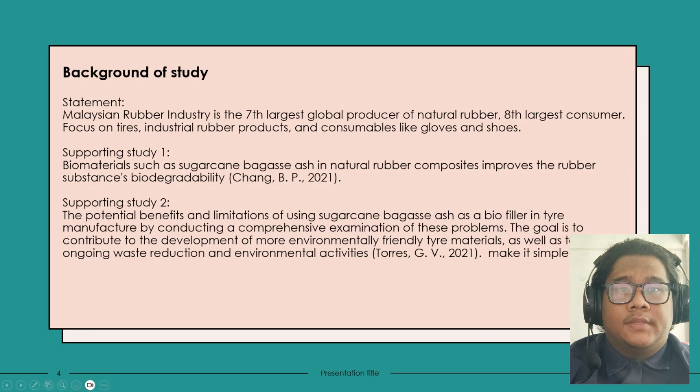Problem statement: carbon black limitation. Carbon black offers high tear strength, modulus and fatigue resistance in rubber, but experiences diminishing returns beyond a peak amount. The effect of transition to sugarcane bagasse is the second point, focusing on sugarcane fiber as a reinforcing filler for sustainable practice, and investigation into the chemical, physical and mechanical properties of sugarcane bagasse ash (SBA).

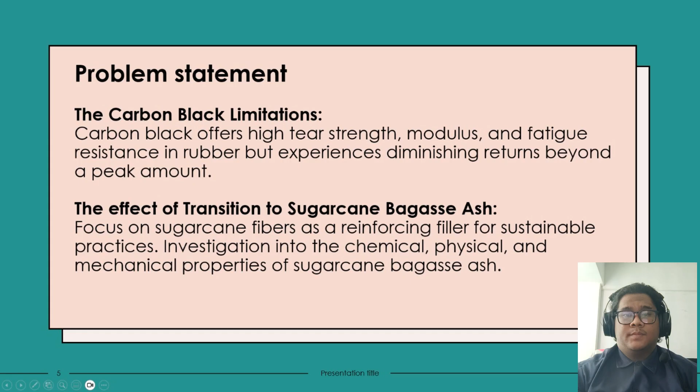Significance of study: the advantage of using bio-sourced material as a filler in the rubber industry. Objectives of study: first, the effect of replacing traditional filler material with bio-based filler on the mechanical properties of rubber compound. Second, how the incorporation of biofiller in rubber compound affects the curing characteristics and processing behavior. Last, the environmental and sustainability benefits of using biofiller in rubber compound formulation compared to conventional filler.

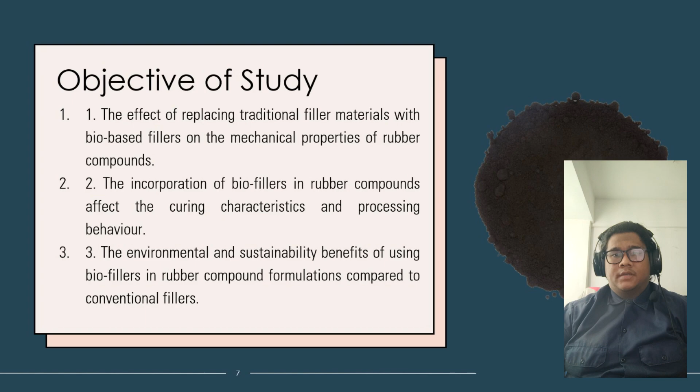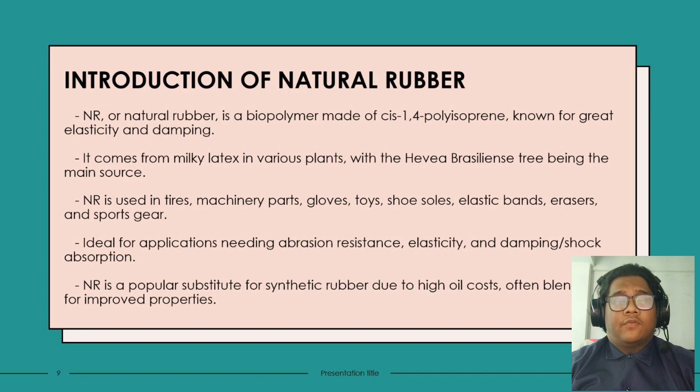Chapter 2, Literature Review. Introduction of natural rubber: natural rubber is a biopolymer made of cis-1,4 polyisoprene, known for great elasticity and damping. It comes from milky latex in various species, with the Hevea Brasiliensis tree being the main source. Natural rubber is used in tires, machinery parts, gloves, toys, shoe soles, elastic bands, erasers and sport gear. It is ideal for applications needing abrasion resistance, elasticity and damping shock absorption. Natural rubber is a popular substitute for synthetic rubber due to high oil cost, and is often blended for improved properties.

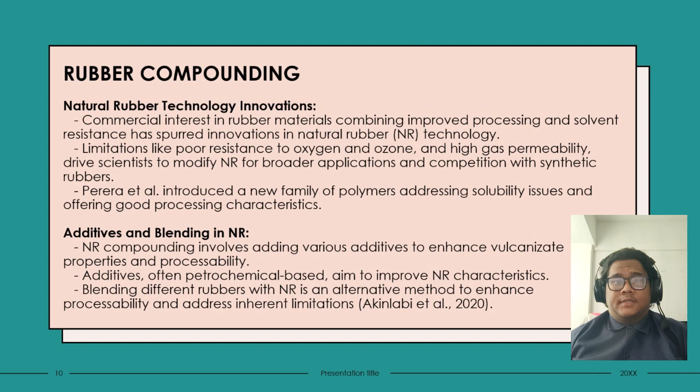For rubber compounding: there's a growing commercial interest in rubber material that offers both improved processing and solvent resistance. Natural rubber has limitations such as poor resistance to oxygen and ozone, along with high gas permeability. This challenge pushed scientists to modify natural rubber, making it more versatile and competitive with synthetic rubber. According to Perera et al., who introduced a new family of polymers to address solubility issues and provide excellent processing characteristics, this innovation brings forth material that not only overcomes solubility challenges but also offers good processing characteristics. This means natural rubber can now find application in a broader range of industries, competing more effectively with synthetic counterparts.

Moving to eco-friendly composites: natural material plays a crucial role in developing environmentally conscious products. Natural materials like sisal, hemp, jute, kenaf and others are commonly used for environmentally friendly composites. Agricultural waste and byproducts are increasingly utilized for composite development, promoting a circular economy. According to Chang, BP, waste-derived material, when processed and purified, serves as a versatile and eco-friendly filler for various polymer systems, including rubber.

Shifting our focus to biocomposites: this material offers a sustainable solution to environmental challenges and limited petroleum resources. Sisal, hemp, jute and others are popular natural fillers for environmentally friendly composites. Agricultural waste and co-products are gaining attention for biocomposite development due to their low cost, abundance and satisfactory performance.

Concluding our discussion, waste-derived bio-based filler holds significant potential for biocomposites derived from agroforestry and agricultural waste biomasses. This material, after processing and purification, can serve as a multifunctional green biofiller for different polymer systems, including rubber. In summary, the utilization of both natural and waste-derived materials paves the way for more sustainable and eco-friendly solutions in rubber compounding and biocomposites.

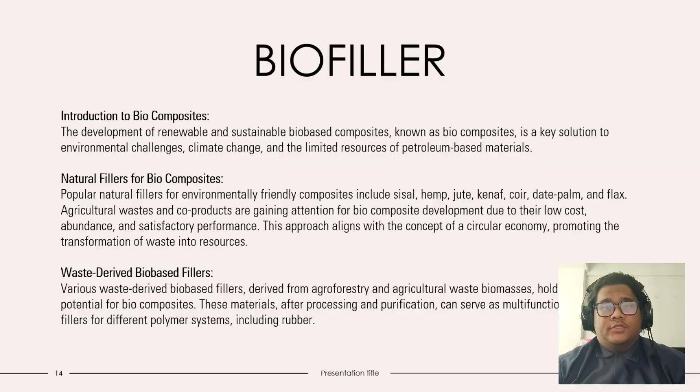Chapter 3, Methodology. This is the process. First, I prepare a master batch using a compound of around 1.2 kg of rubber. Second, I produce a homogeneous master batch sheet around 6 mm thickness. Next, for formulation and division, I divide a 428 gram section of the master batch sheet into 4 equal pieces, adding an appropriate filler to each section based on the formulation base.

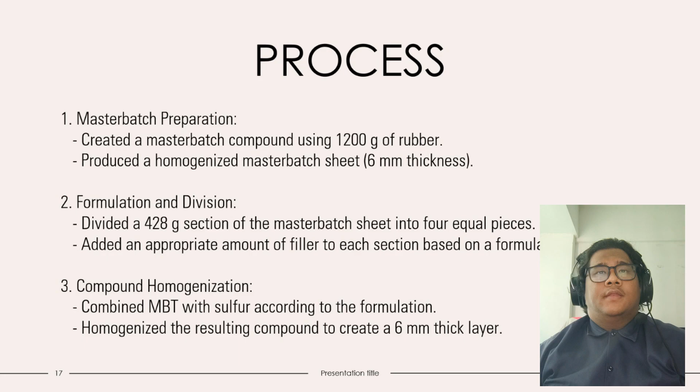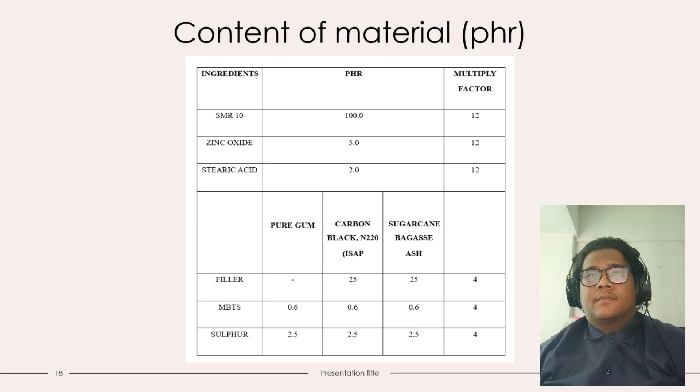Chapter 4, Result and Discussion.

The result for pure gum can serve as a baseline or reference point for comparison with biofiller-containing compounds. The scorch time, cure time, Mooney viscosity, and curing index are essential parameters that indicate the processing and curing characteristics of the rubber compound.

Carbon black is a common reinforcing filler in rubber compounds. The lower scorch time and higher cure time suggest a change in processing behavior compared to pure gum.

The increased Mooney viscosity and maximum torque indicate enhanced reinforcement, while the lower cure rate index suggests a slower curing process. The result for SBA shows a further reduction in scorch time and an increase in cure time compared to carbon black.

The higher Mooney viscosity and maximum torque for SBA suggest a potential reinforcement effect. However, the lower curing index indicates a slower curing rate, which may impact processing efficiency.

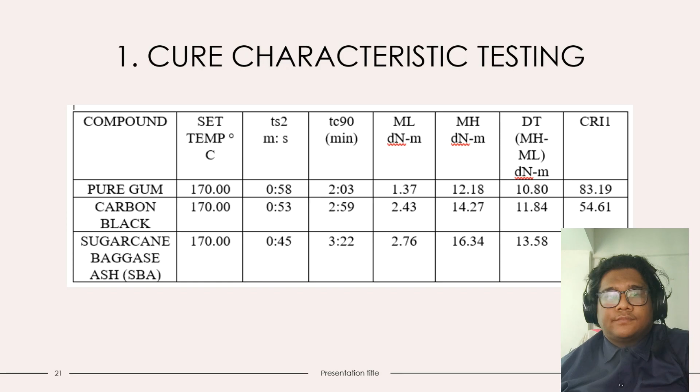For hardness testing, the results reveal distinct mechanical properties of rubber compounds with various fillers. Pure gum exhibits consistent hardness around 38.5, indicating stability without additional filler.

Carbon black, a reinforcing filler, significantly increased hardness to around 46.0, enhancing mechanical strength.

Sugarcane bagasse ash (SBA) introduced variability in hardness, ranging from 54.17 to 58.5, suggesting its potential to reinforce the rubber matrix. While SBA shows promise as a biofiller, further optimization studies may provide insight into a more consistent impact on hardness in rubber compounding applications.

Overall, the results underscore the diverse effects of filler on rubber compound mechanical properties, with SBA demonstrating potential as a biofiller.

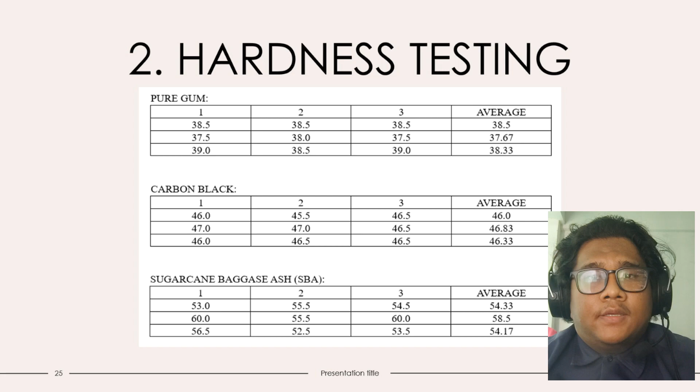For abrasion testing, based on the results, pure gum consistently exhibits the highest volume loss across all sets, indicating the highest susceptibility to abrasion among the tested materials.

Carbon black shows some variability in performance across sets, making it challenging to determine a clear trend. The last one is SBA, sugarcane bagasse ash, demonstrating an increase in volume loss, suggesting a potential reduction in abrasion resistance.

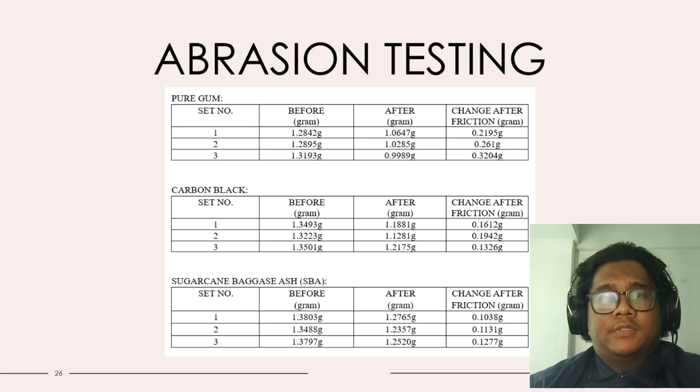For density meter testing, in the realm of rubber compound fillers, pure gum sourced from rubber tree latex stands out for its inherent suppleness and low heat accumulation, improving flexibility, resilience, rip strength, and abrasion resistance.

Carbon black, a popular reinforcing filler, enhances tensile strength, wear resistance, and durability due to its large surface area and excellent reinforcing qualities. However, its high density contributes to the overall compound density, as we can see in the result.

The last one is sugarcane bagasse, an environmentally friendly filler derived from agricultural waste, offering increased hardness and stiffness with a moderate density, striking a balance between reinforcement and sustainability.

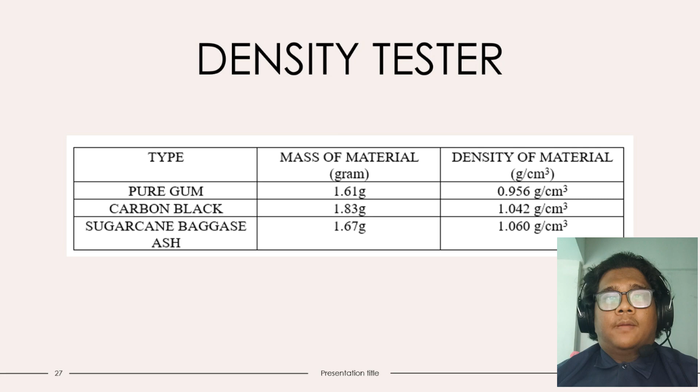The optimal choice among these fillers depends on the specific requirements of the rubber product: pure gum for elasticity, carbon black for strength, and sugarcane bagasse for a sustainable solution. This guides the selection for a harmonious blend of qualities tailored to the intended application.

For the last testing, rebound resilience testing: the test results show that pure gum has the highest rebound resilience, followed by SBA and then carbon black.

This means that pure gum is the most able to recover its shape after being deformed by an impact. SBA has a higher rebound resilience than carbon black, which suggests that it may be a viable replacement for carbon black in rubber. And that's all for the testing.

I'm sorry to inform you that the tensile tester at the lab, which is crucial for conducting tensile strength tests, has unfortunately been out of service since week 11 due to technical issues.

The machine encountered a malfunction and the technician has been actively working on resolving the issue. Despite their efforts, it appears that the repair will take more time than initially anticipated.

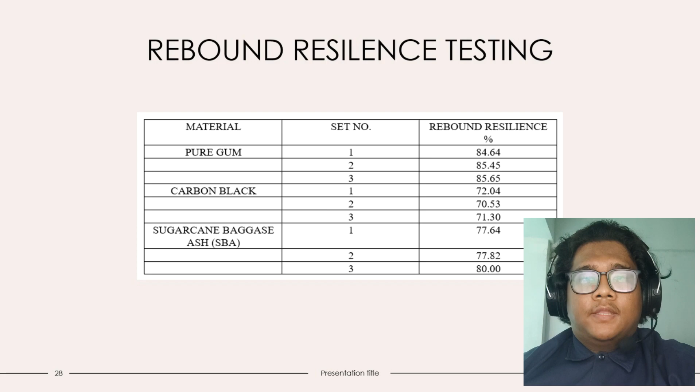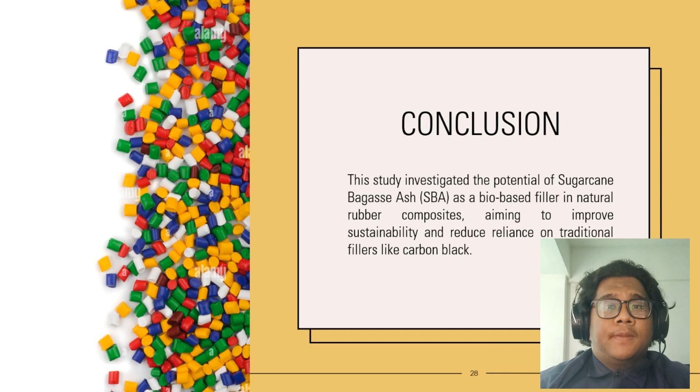So, for the final conclusion of this thesis, the study investigated the potential of sugarcane bagasse ash (SBA) as a bio-based filler in natural rubber composites, aiming to improve sustainability and reduce reliance on traditional fillers like carbon black. That's all from me. Thank you.